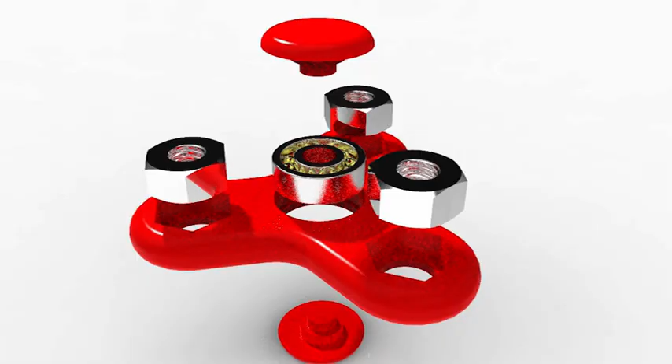In this video I'm going to show you how to create an exploded view of your fidget spinner. Once you've learnt this technique, you can use it with any of your models that have multiple parts.

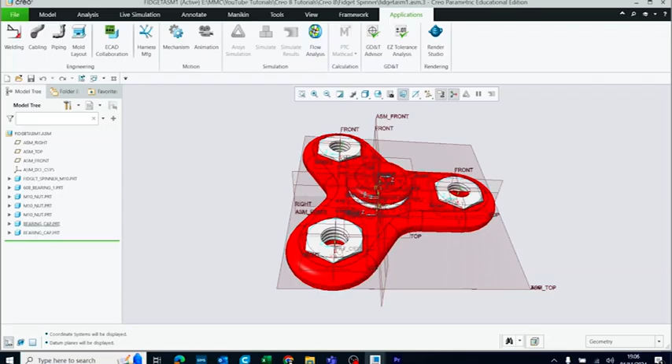Now you should have a model similar to what I have here on the screen. You should have placed your M10 nut into the 3 locations, the 608 bearing into the centre, and then your cap has been brought in twice, once for the top and once for the bottom. You'll notice the cap sits higher on the top than on the bottom, because there's a ledge on the bottom for the bearing to sit in.

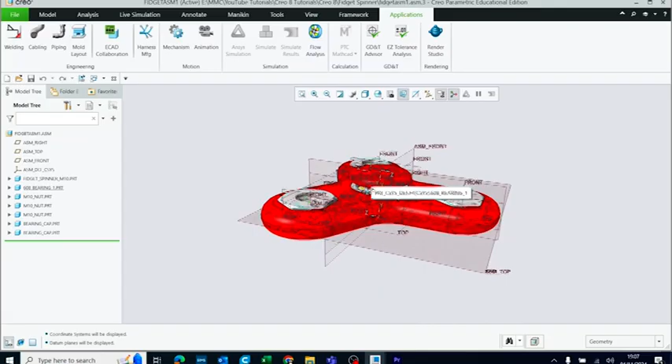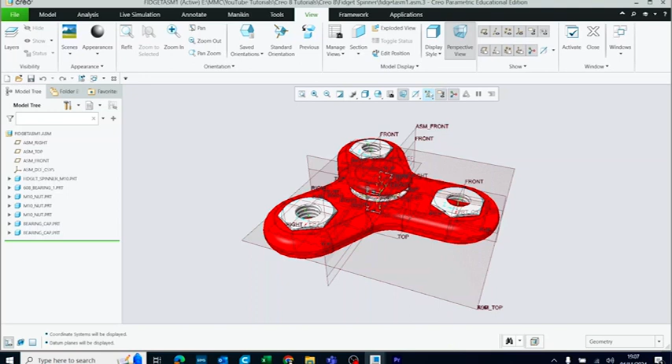Now, what you can also do here is turn some of these frames off. If you click on this icon here - I'll hover over it so you'll see it's called Datum Display Filters - you can turn them all off by selecting all, and then you're just dealing with the model itself.

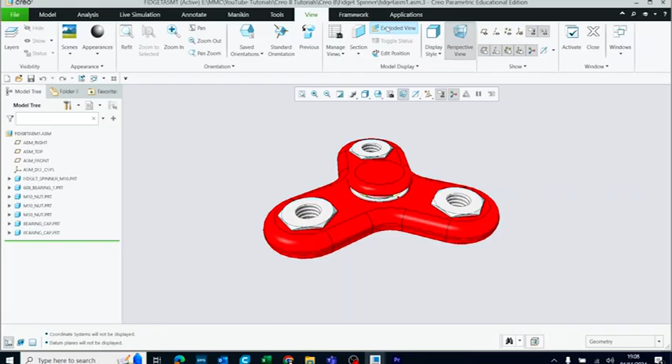Now here, if you select Exploded View, it will break the model into an exploded view, which is good, but it's not where I want all my components to be. I actually want the nuts to be above the body and the bearing and so on.

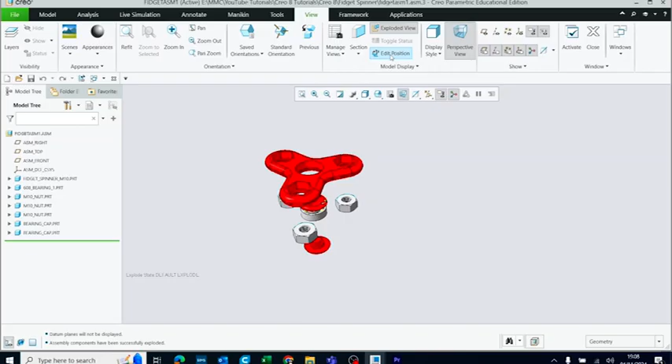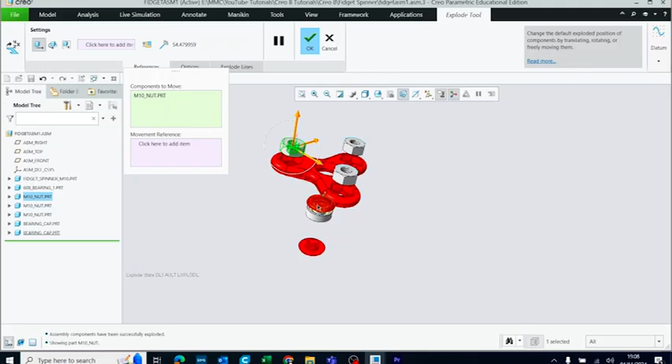So now I'm going to click Edit Position. Once you're in this mode, you can click on each component and drag them. I'm going to drag that slightly above, click on each nut, move that round, grab that one, and drag it using the arrows. You can drag it left and right, and change any of the positions wherever you want.

So I'm going to bring the cap in. What's brilliant about this feature is I'm going to just get it roughly what I want, and then press OK. Then I'll bring that back into the middle and have a look to see if I'm happy with the position of all the components for a rendered view.

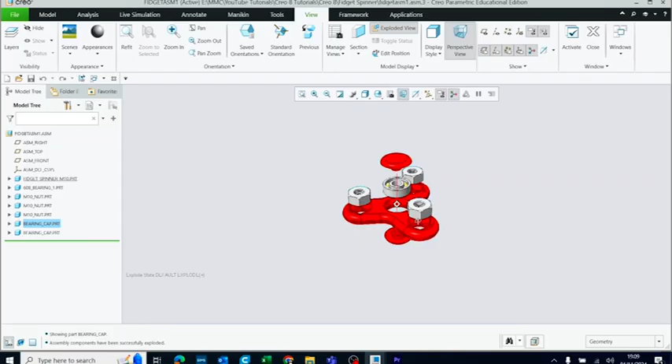I still think I could move things around here, but what I want to show you now is this. I've moved the positions, and now if I press Exploded View, you'll see everything returns to the original assembly, which is a huge benefit to you as a designer, to show your product exploded and have it return.

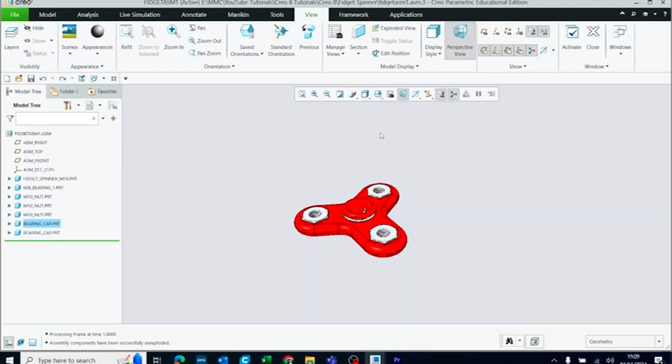So if I go back to Edit Position, you'll see that the components are now in the position I put them in, but I just want to adjust a few of these.

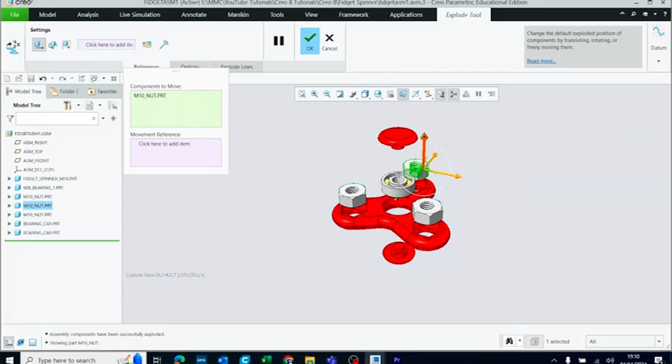I want to bring the cap down a little bit, maybe the top cap up a little bit, and then bring that up so I can now see all of the components a little clearer in where they might be ending up. Okay, if I press OK there, I want to get it into the view.

I'm not far away from the view I want there. I might just tilt that. And now I'm going to go into the renderer.

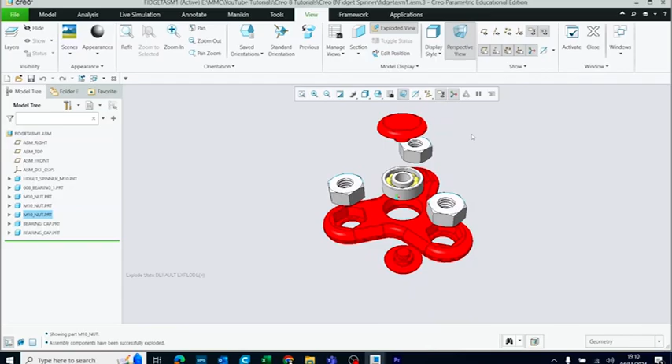So we go into Applications and into Render Studio, and we should see that here. So it's giving me a more realistic view. Now, I'm not happy with this grey background - I much prefer a clean white background, so you're focusing on just the components.

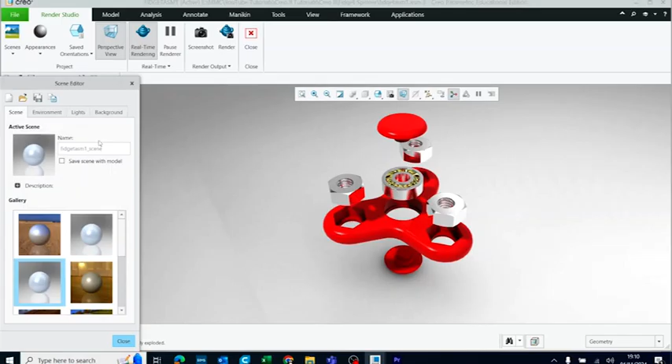So I'm just going to go up to my scene, go to Edit Scene, and when you're in here, if you go to the Background tab, under the drop down menu you have an option of Environment, Blend, Image and Color. If you choose Color, the default color will be white. You can change that color by double clicking, and change the background color, play around with that and press OK.

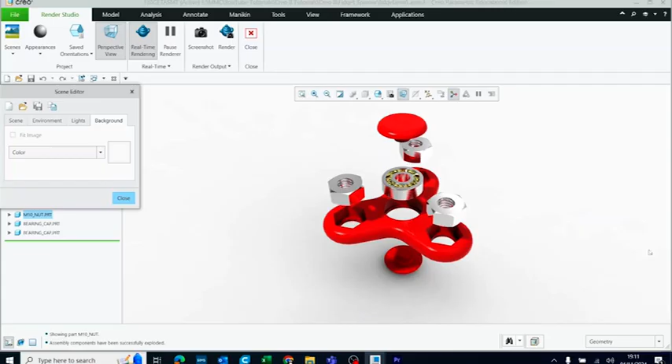It will change your scene for you, but for now I'm going to keep that as white, and then I'm going to set that to render.

So I'm going to browse, and set this to my working directory. But for now I'm going to call that exploded view, and I'm just going to put that onto my desktop.

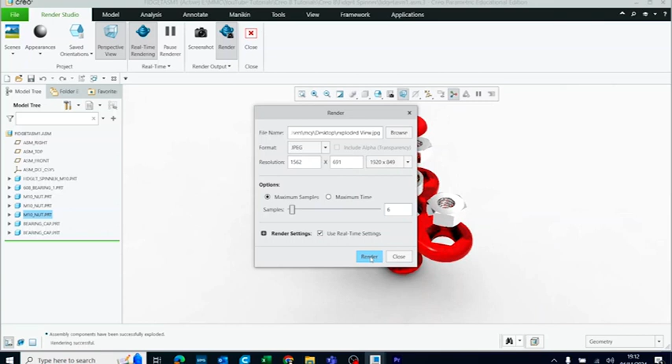Okay, so there's a render that has now been completed, and I can now put that into my portfolio.

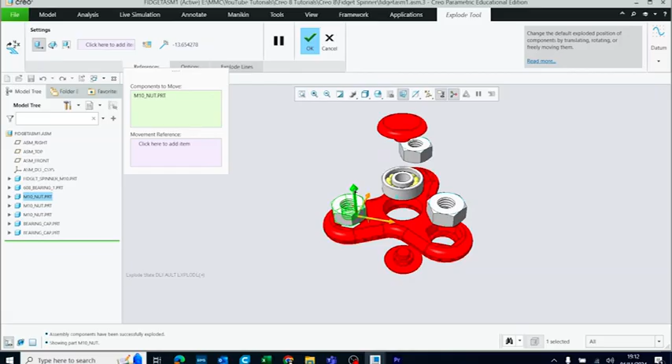So I can close the renderer, and then maybe play around with another exploded view where you could show it just where the components actually enter the main body. So you can show it in different variations of construction, and then take another render.

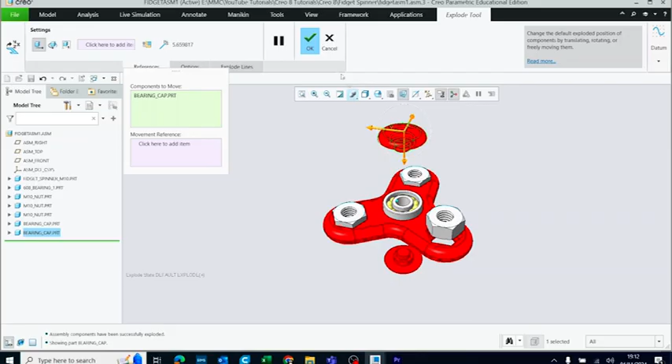So do experiment with that feature, because it's very powerful for your portfolios to demonstrate how components come together, certainly products with multiple components.